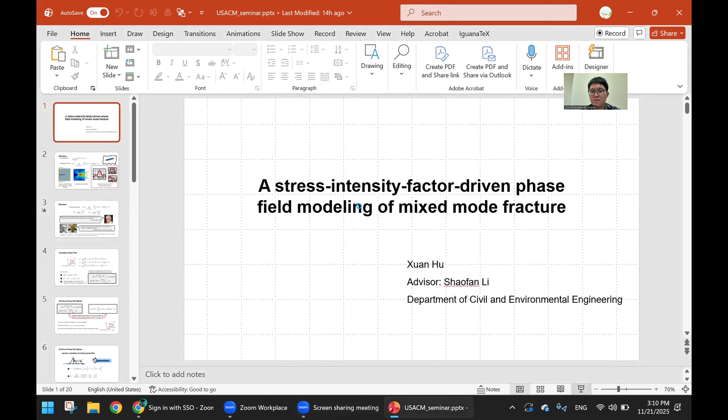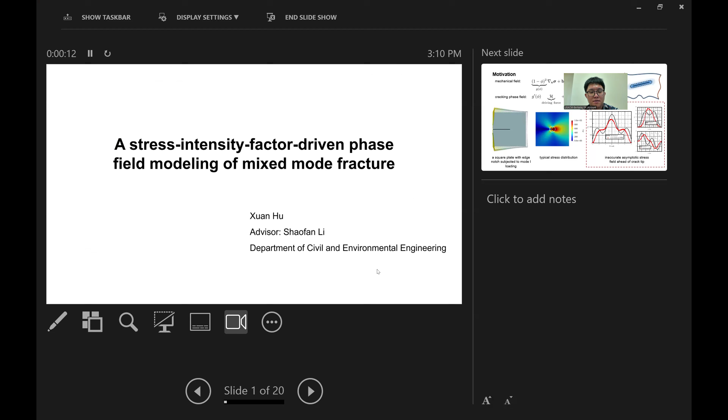I'm not sure if Nanda is going to join us. Hey, what? Great. Yes, in the yard. I don't know. Oh, that's a Discord channel. Subscribe to the latest updates. Are you on emails? I don't think so. Let's see, hold on. Not Discord. Wait, let's scan. They're doing emails. Hold on one second.

How can I share? I think I should be able to share the entire screen. If you share PowerPoint, it should configure it properly. So share PowerPoint and now go into presentation mode. Right. Okay, let's start. So it should be recording. Right. So thank you for coming.

Today I'm going to talk about my research regarding stress intensity factor-driven phase field modeling of mixed-mode fracture. I will split this presentation into two parts. The first part is my research, and the second part is a little bit about how to use FEniCS, because most of us are using the finite element method in our research, and FEniCS is a really great open source package with a really great Python interface. You can use it to build up your finite element model. So I will start talking about my work first.

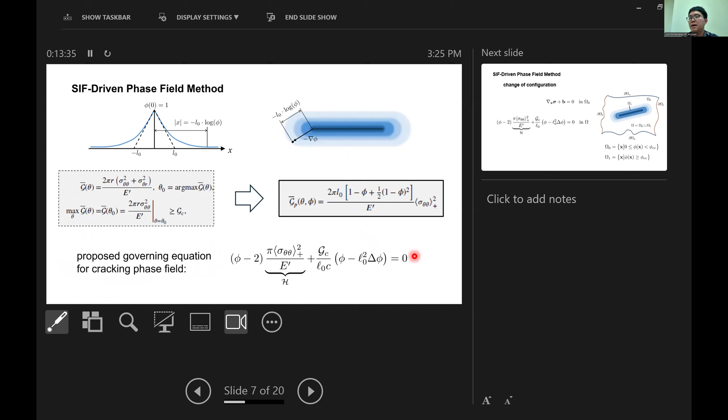And now we have already got a driving force that has a solid foundation in linear elastic fracture mechanics. But the problem is still this: how can we make sure the stresses are accurate ahead of the crack tip? So instead of using the degradation function here, as in the traditional phase field method, we adopted the idea of change of configuration. That means we don't have a degradation function here.

Instead, we divide the whole domain into two parts. One is omega 0, which corresponds to the domain that has a phase field value greater than 0 and smaller than a critical phi. So this domain we will assume is just a sound material without any fracturing or cracking problem. And then we have another domain where phi is greater than the critical value. So this domain we will treat as a cracking area, or just a crack in the space.

So in doing so, we just solve this linear momentum balance equation in the omega 0 domain, and we don't do that in the omega 1 domain. And this can be done by FEniCS. And then for the phase field, we solve it in the whole domain. So the whole domain refers to the union of omega 0 and omega 1.

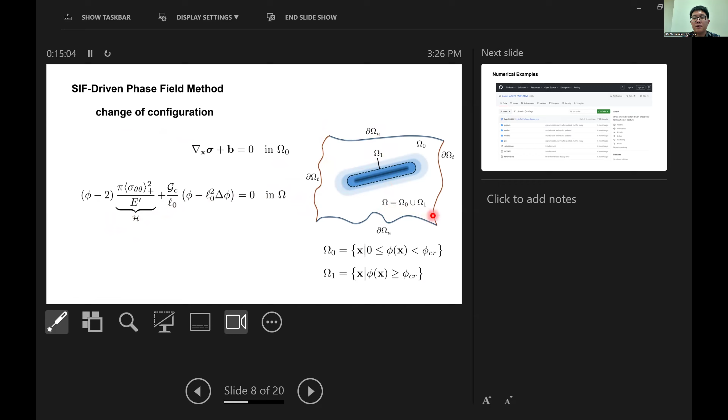So basically that's pretty much what I want to cover. And now I want to show some numerical examples to validate our method and see the application of our method.

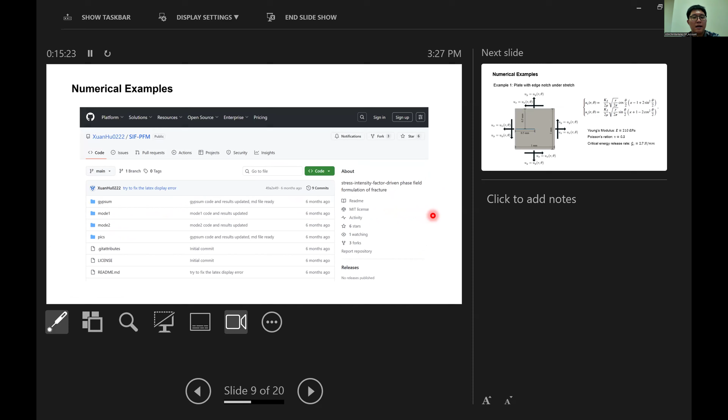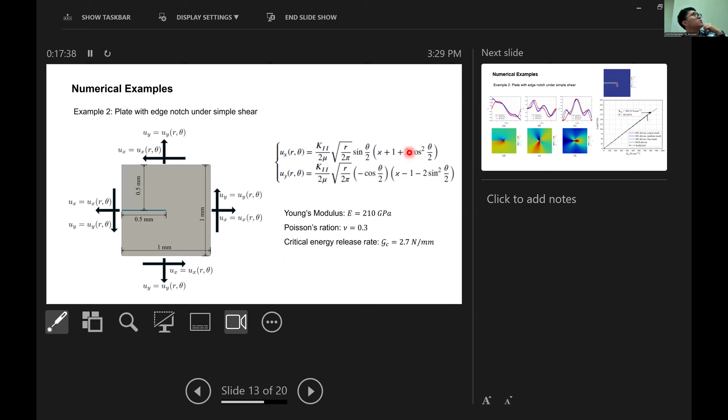So this is a first example to validate our model, and we continue our journey by looking at mode 2 loading. We just specify the mode 2 loading on the boundaries of this plate. We use the same material properties as before, and we can see the stress field ahead of the crack tip, the so-called asymptotic stress field, still aligns very well with the analytical solution.

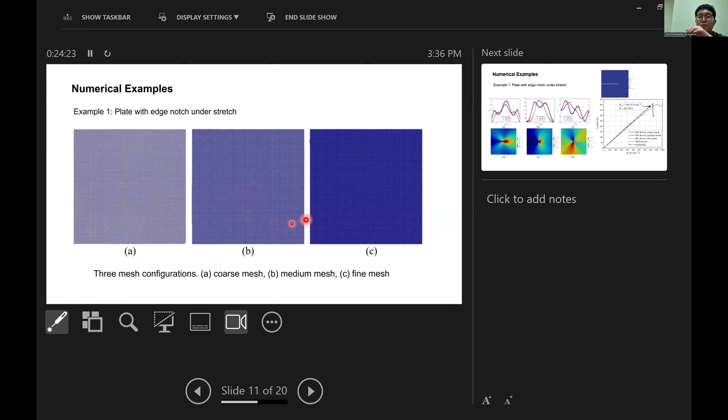So I guess that depends on the resolution of your model, how fine the mesh is in your model. So yeah, actually, I think this is more relevant to your question. So basically, we have three different meshes. That means if you have a really fine mesh, you can have a really thin crack, and actually the mesh sensitivity is not a problem in my method because I use three different meshes and they give me the same results.

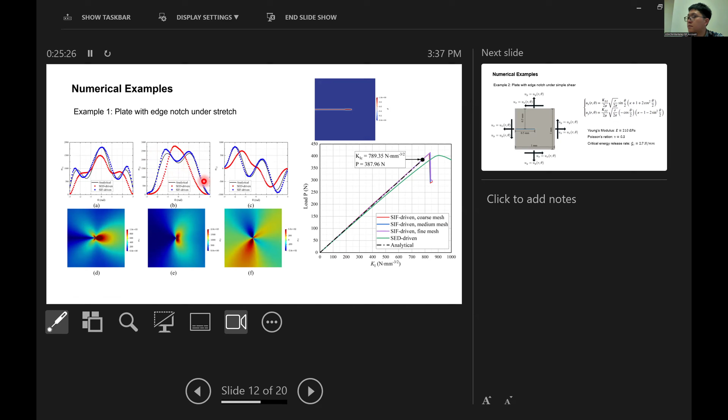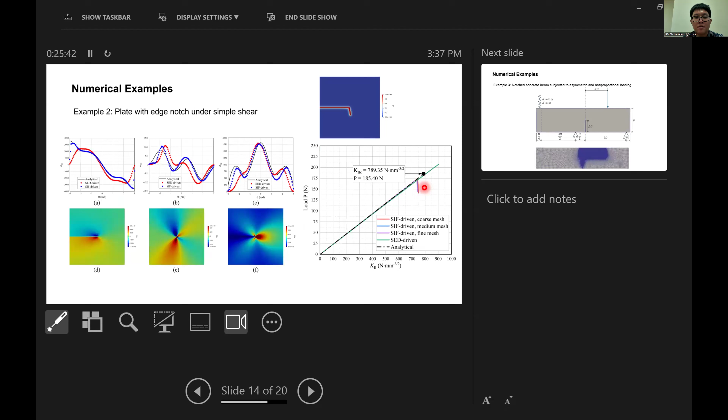From the theory perspective, it is because we use linear elastic fracture mechanics theory, so it's just going up and dropping down. It doesn't have any cohesive behavior. So I think this post-peak branch corresponds to the cohesive behavior in the material, and this part hasn't been investigated in my research. Another reason is I observed that the crack can propagate really quickly in the phase field method if you don't have any cohesive behavior introduced, so this is why there's a sudden drop from the top to the bottom. I think how to incorporate the cohesive behavior after the initiation of the crack is an interesting topic to explore.

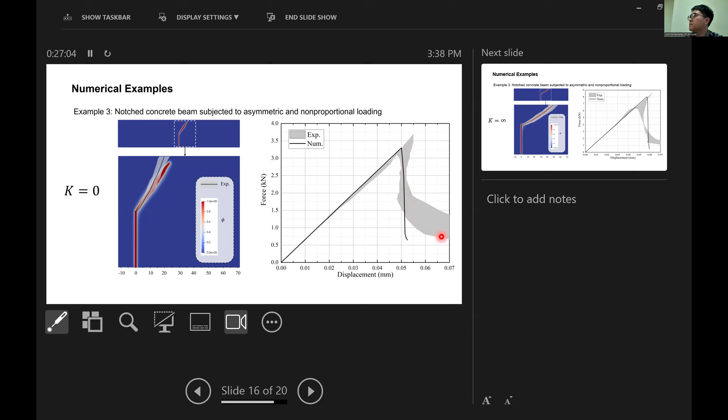Yes. Can you go to the last slide? You see that the tensile fracture is there, and then there are shear fractures. Right? Why don't you have shear fracture in your next one? So, yeah, I'm not sure. Well, my theory is because this shear fracture actually corresponds to a domain, one area that's being totally damaged. So it's not like a very clear fracture line there. It's just so many tiny fracture lines, crack lines here. So I guess that's it.

So yeah, I'm also interested in why we don't have this point. Maybe it's because of some flaws that it inherently has here or here. I'm not sure. I guess I need to investigate this problem later.

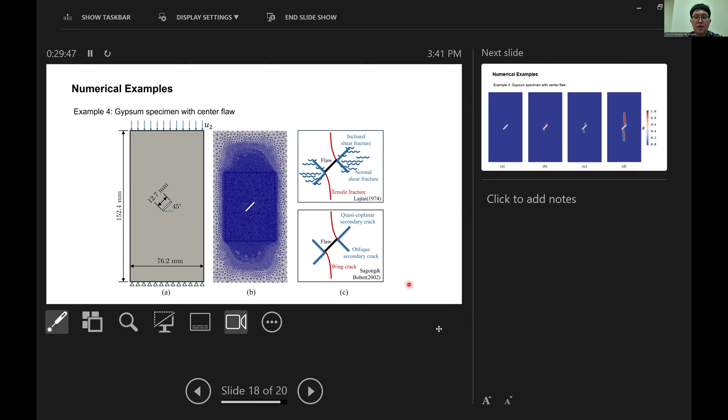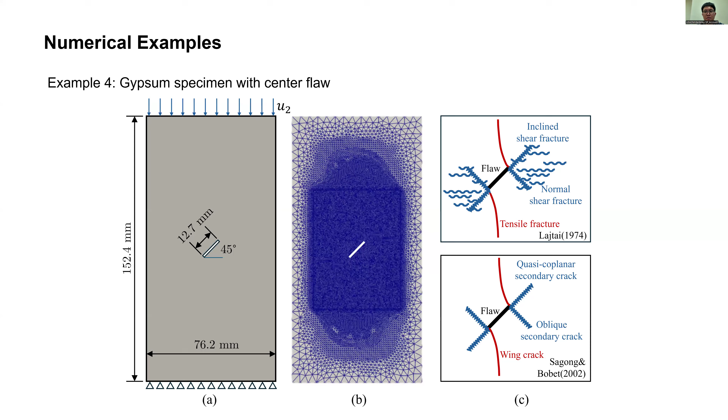Okay, so that's the end of this part, and then I just want to show briefly my way to use FEniCS. You might be able to share. Oh, okay. Full screen. So my way to use FEniCS.

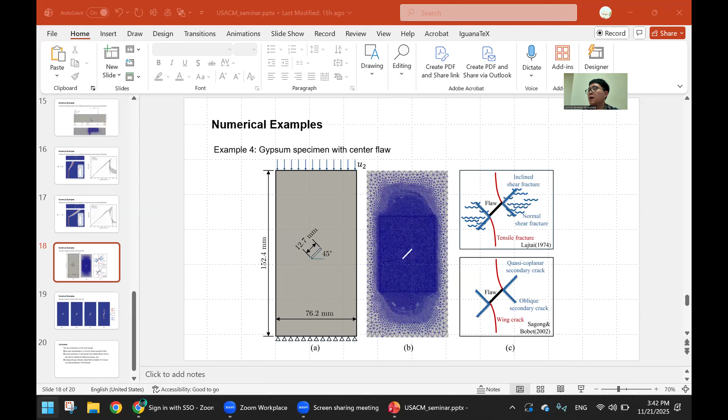Well, if you have an Ubuntu or Linux system, you don't have to look at this part. Just in case you don't have one, I think the best way to use Ubuntu and FEniCS in a Windows system is through VS Code, and in that case you need to install the Linux system. It's called WSL. So first of all, you need to install WSL in your Windows system, and you can find so many tutorials online on how to activate WSL in Windows. You can just follow those command lines one by one, and then you can install it.

After installing it, you can connect to WSL in VS Code. You can just type in connect to WSL, and then you will connect to it in a second. After that, you will have a terminal here. You just click on this cross and warnings, and then you can switch to terminal here. I installed Copilot, so maybe that's the reason. Then you can just follow the instructions given by the FEniCS project, and it writes very clearly.